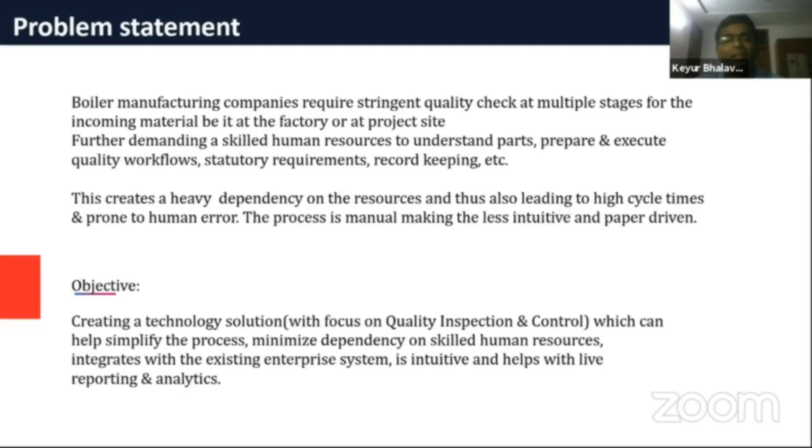The proposed solution is an amalgamation of multiple technologies, wherein the prime tech is AR, but it will be assisted with AI/ML, 3D workflow instructions, and remote collaboration.

The approach we are planning is to first start with wireframing, similar to storyboarding, where we'll understand the workflow, decide on the before and after workflow, and parallelly define the sketches for the technology front. After that, we'll go for a POC, wherein based on the output of the POC, we'll proceed with a full-scale implementation. While doing the POC, we'll work out the methodology.

We'll also take an important decision on a few steps, such as how to scan the object, whether it should be a QR code or a mix of AI, ML, and AR. We'll also decide how to guide and assist - once identification is done, how we can project things.

So the checklist would either hover around the object, or it will be a separate 3D model where you can interact and see. The technology we are looking at on the front end would be iOS, Android, and Unity.

On the backend side, the most important thing we wanted to clarify is that we currently use AWS, but we are open to using Microsoft Azure or Oracle Cloud if the company has that, we can definitely work around that. For visualizations, you scan the equipment - it can be a bigger equipment, a small equipment, or a part...

...and you will see pointers and the checklist coming near to that equipment. There is also an option wherein you can see a separate 3D view, which can also be taken as a training module for people who are a new hire or a lateral hire for the parts and equipment which are the incoming materials.

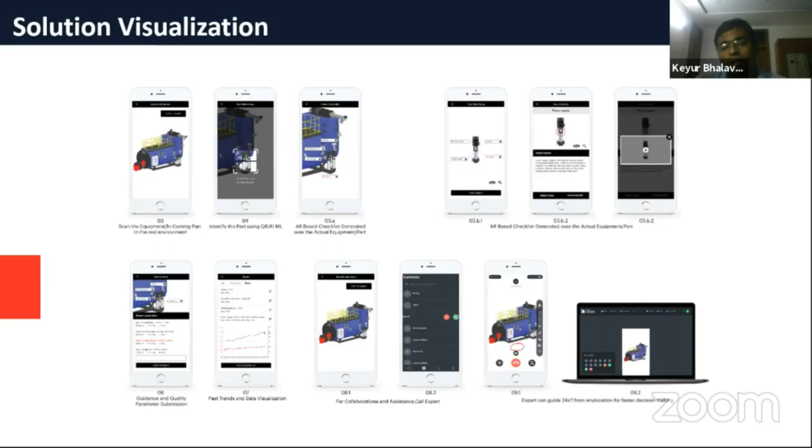In case you have trouble not being able to take a decision, or you have any doubts, we are intending to add a module for remote collaboration, wherein you can call an expert for help - it can be an expert, a supervisor, or any segment expert who might not be available at the same field.

The success criteria here would be measuring KPIs on productivity improvement, the time taken by the new hire to onboard on routine work, the before and after process work - the number of steps reduced, time reduced - the overall reduction in rejected parts, and the output of the solution.

Similar to what we were looking at from the objective perspective, it has to be tech-enabled, simplified process, cost optimization, minimizing the dependency, and on-the-job training. The timeline for implementation of this use case for the POC can be 6 to 8 weeks. For the full scale deployment, it can be 14 to 18 weeks.

This is a similar use case, almost an exact replica of the previous one. The only difference is this is maintenance, while the current use case is quality. Here we are digitalizing the complete manual maintenance process: identifying the machine, checking the maintenance schedule, selecting the checklist. The assisted pointer will be highlighted over the machine, and in case of any problem, a remote expert can be connected. We are also creating a digital library here, plus there is a maintenance schedule which will be triggered.

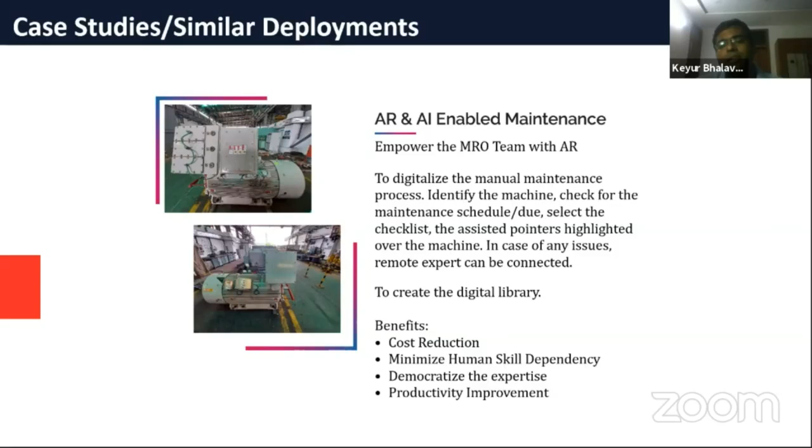Similarly, for inspection, if items are nearing their shelf life, the inspection can be triggered. Those kinds of similarities can be drawn, and that can help us execute the project even better. The benefits here: first and foremost is democratizing the expertise, which helps in minimizing dependency, reduction of cost, and productivity improvement.

Another similar case study is one of our ready to implement products, available as a subscription, where you can have remote assistance enabled with AR, which helps in collaboration between field service technicians and offsite employees. It benefits by not requiring a technical expert at every location, can eliminate travel, supports on the job training, improves first time fix rates, and can also help with inspections from remote locations. We have implemented this product across various companies like Sterlite, Reliance, Honeywell, etc.

Machine AR is nothing but the first step towards digital twinning, which is creating the 3D assets and procedures. That's what we're good at, creating a low poly model of all the assets. Once we have the low poly models, based on the use case, we can typically create AR based applications. It can be used for onboarding training, digitalizing the manual, customer engagement, or whatever the use case is.

For this use case, it can be more about creating the procedures and assets of these parts and equipment which are incoming, and then creating a training out of it - how to inspect, what sub assemblies need to be checked, and when we talk about the checklist, what pointers need to be typically checked.

I think this is it. These are a few of the clients where we have worked. Thank you so much, looking forward to the collaboration, and thank you everyone again, looking forward to working as a team.

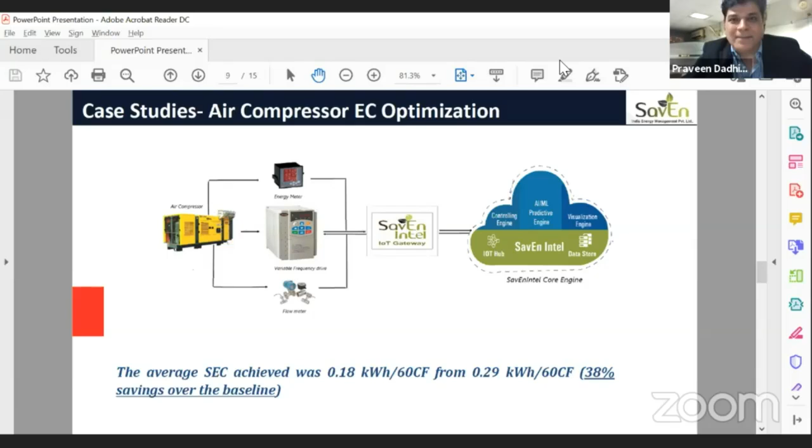Thank you, Praveen. Again, best wishes. Thank you. For actually working on the problem. Thank you so much. Okay, thank you.

Okay, next we have Nagendra. Hi, Nagendra. Congratulations. Thank you so much. It's been really amazing. Yeah, I'm sure you would have kind of spent a lot of nights in coming up with this. I mean, because considering the nature of the challenge it was actually very tricky. Good job. Yes, definitely. I completely agree. And I think our team here has put a lot of efforts, which made us to get this statement today saying that we are the winners. We're really happy. And it's the second time through NASSCOM. First time was with LG. We are AI partner for LG through NASSCOM. And this is the second time with RPG group through NASSCOM. So it's amazing platform. I'm grateful to the NASSCOM team.

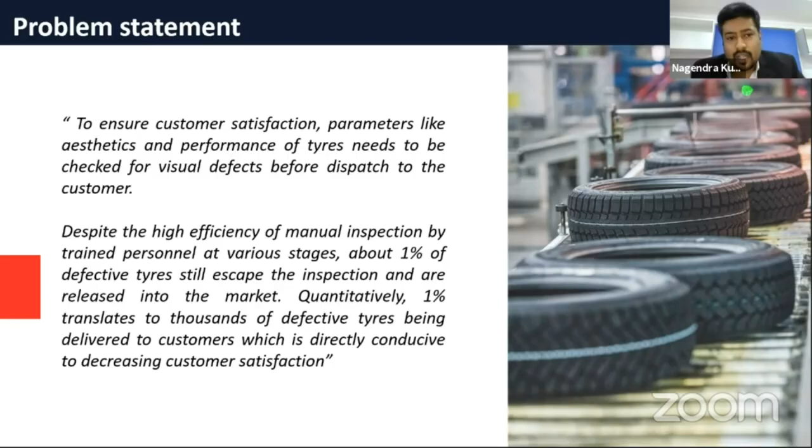Moving ahead quickly, as we all know the problem statement, so it was all discussed. Any tire missing the inspection going to the customer is a big pain to both of them. So that's what we are trying to solve, and how to solve it is here.

So we have completely given our thought to developing an in-house complete solution where you will have the tire getting inspected through, I would say, a kind of conveyor belt system where we have the capability of putting a 360-degree ball transfer system. So once the tire lands there, we have lasers which capture the profile of the tires from all 360 directions. This profile is then used and analyzed using a software solution, which is completely AI/ML based.

Our company specializes in AI/ML, and we are already working with LG for an anomaly detection use case. We also have the capacity to develop our own software along with the mechanical system to run the whole solution. Here the key aspect is the profile captured from the scanner exactly gives the anomaly, and we are also planning to use cameras. It can take your complete profile - edge, surface, all the technical aspects defined by the use case owner - taken care of by this solution. This can detect a defect up to 12 microns at a resolution of 2048 points.

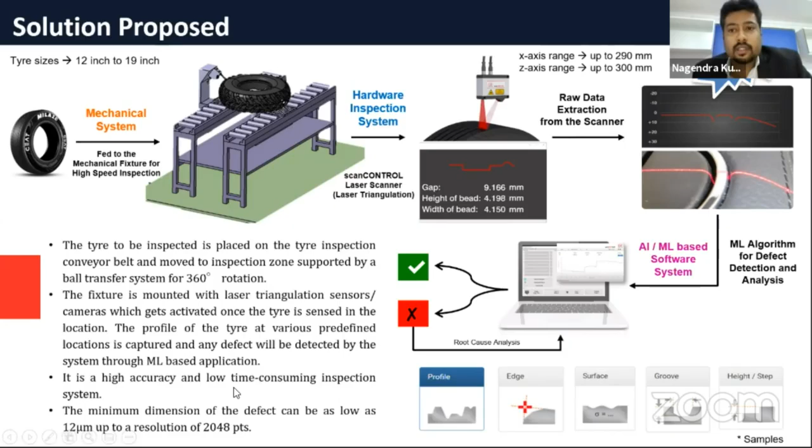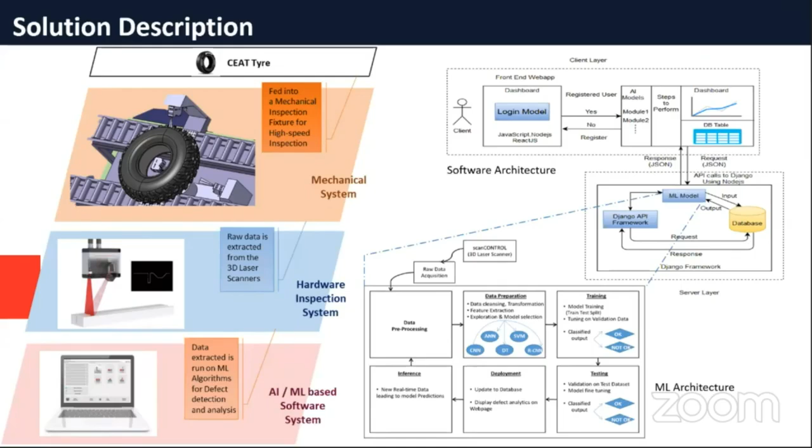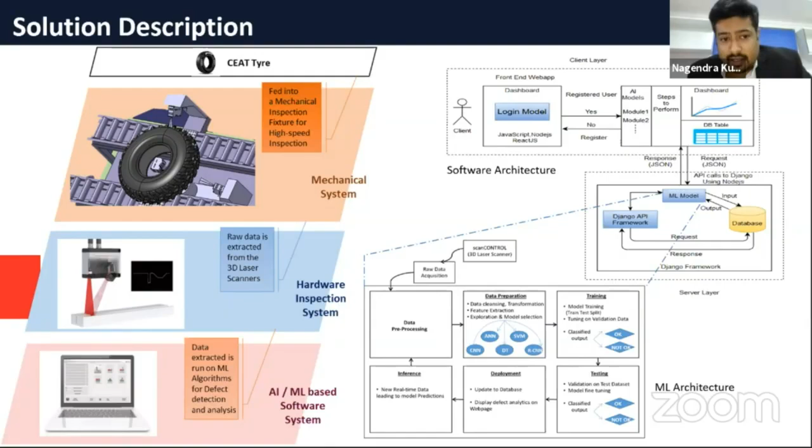What's special with Redom Tech is the ML models which we develop in-house. The actual profile of a good tire is taken up and trained, and we have complete expertise of training, testing, and deploying ML algorithms in the operational environment. We also have the capability of deploying the solutions on edge, and we are a partner for one of the US companies developing edge devices to handle such high-speed inspections.

The target we have kept is inspection accuracy should be more than 95%, and inspection time we are targeting is almost 10 to 20 seconds, which is our milestone, based on benchmarking with some of the people who have been doing this in the world. For defects handled, we are targeting 20 defects in phase 1, and phase 2 cumulatively 40. So escape rate we are targeting is less than 1%.

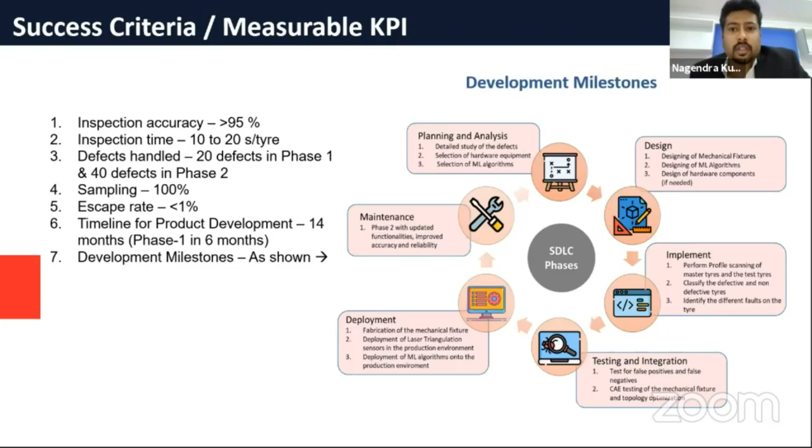Timeline-wise, we have phase 1 for 6 months, where we have the prototype, and the complete functional product in 14 months. To talk about case studies, we have undergone complete understanding that a German tire manufacturer is using these kind of sensors, as well as camera, to extract the 3D profile of the tire, where 95% and above defects have been identified and taken care of in the automated line.

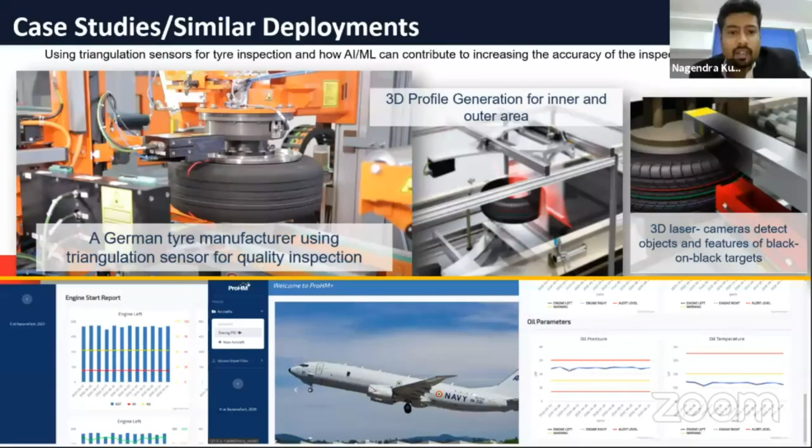If you see on the bottom of the screen, we are already developing a particular solution for Indian Navy, where we are managing the health of an aircraft with more than 3,700 sensor data coming every second. This is the kind of data we have handled and the accuracy we are targeting. This is what we would like to offer to our customer.

Thank you, NASSCOM. I would like to say thanks to all my team here who have made it happen to take the first step now. The big challenge is ahead on execution and delivery as per expectations. Thank you.

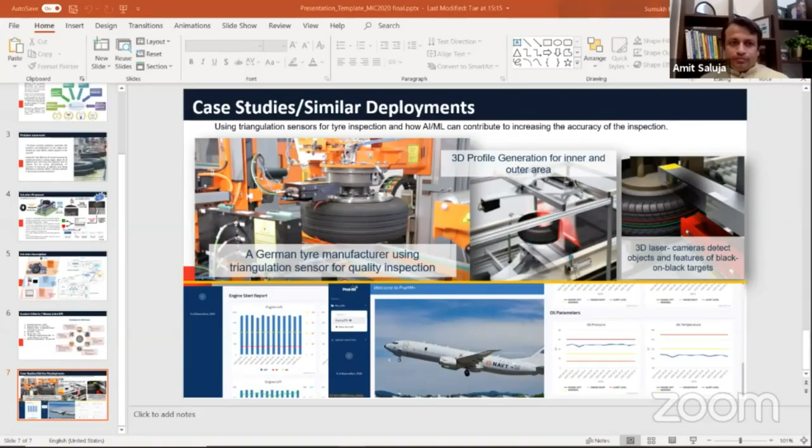Okay, so we have Akshata with us. Hello. Hi. Hi, Akshata, congratulations. Thank you, thank you very much. No, thank you. I know it's been again a very tricky use case with so much complexity. Good job doing it.

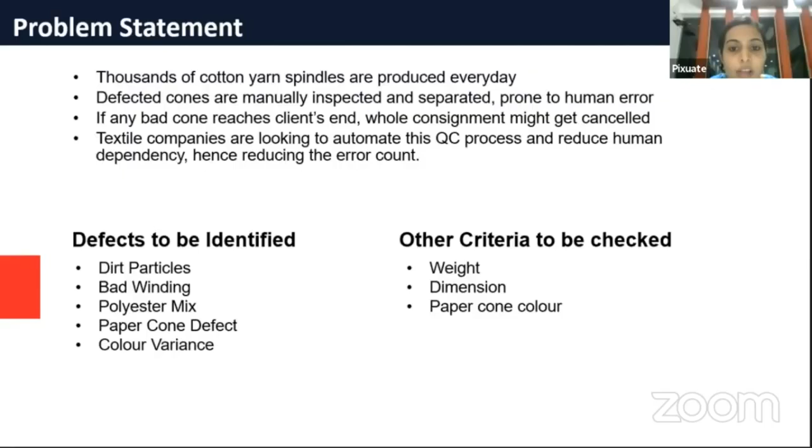Let me just go through the use cases and help you understand what we are trying to solve here. This is for the garment cotton yarn cone manufacturing sector, where thousands of cotton yarn cones or spindles are being manufactured, and there is QC required to identify defects at the last point, which is currently done manually. They are looking to automate this process using a vision-based application to identify defects such as dirt particles, bad winding, polyester mix, or different material mix in the threads, also a defect in the paper cone, and any color variance. So these are the different defects we are looking to identify, and also segregate based on different criteria, be it weight, dimension, or paper cone color.

So this is how the system will work. We will place our edge computing device with our proprietary vision software to do a 360-degree inspection on the assembly line inside a UV chamber.

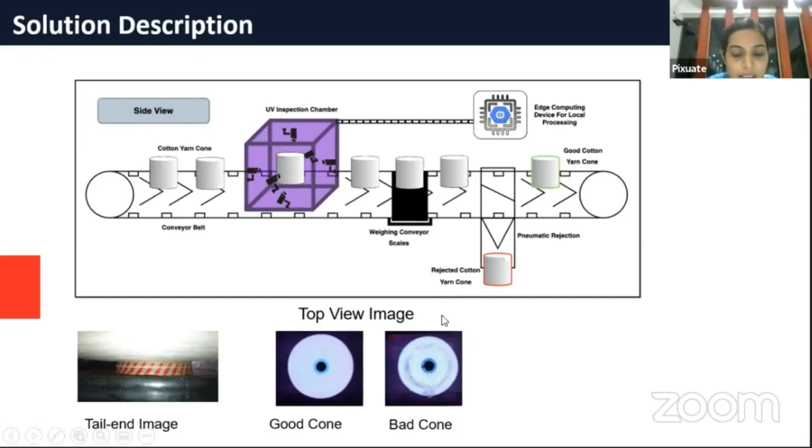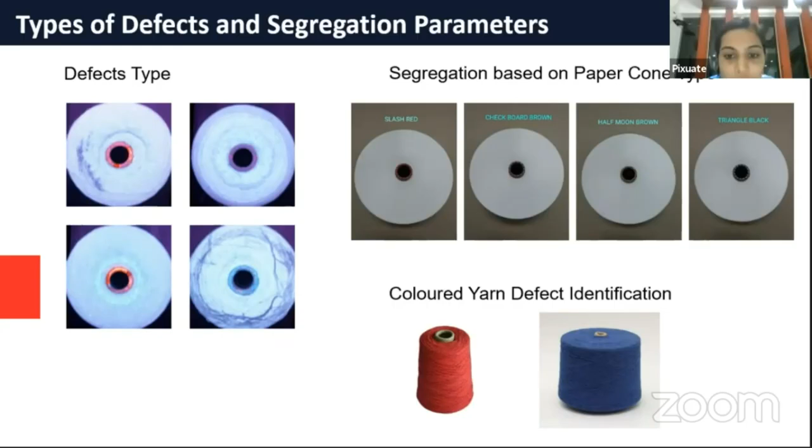And then based on the input, if there is any defect, it will be separated or segregated based on the segregation criteria mentioned. So we will be training our system to identify various defect types, also the cone types. We can work with both white threads or any colored threads, cones, and also further defects which the customer would have.

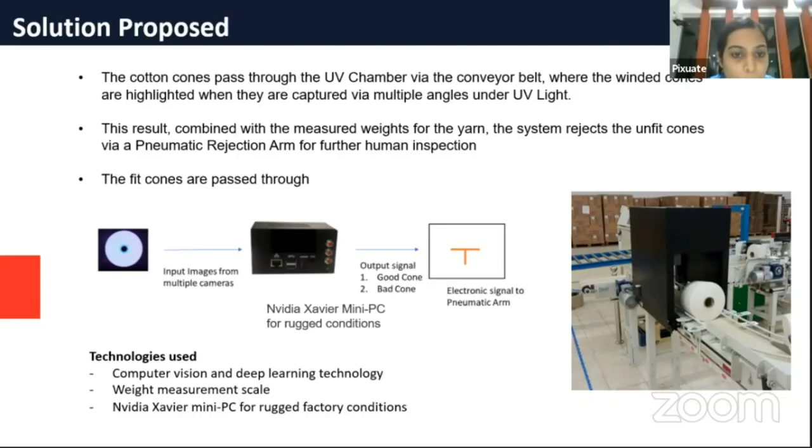So this is how the system is set up. We use computer vision and deep learning technology, and we can integrate various other sensors, be it a weight measuring scale or any other sensors required to work on a certain throughput that the customer requires. Currently, we can work on a throughput of

30 to 40 cones per minute, which can be improved as well. We are planning to deploy this solution in a 3-month duration, starting with the audit and site inspection, understanding the requirement, and then building a prototype, which would be a 6 to 8 week timeline, both for the hardware and software prototype. And then we can go ahead and deploy the pilot in the last month.

So what we are looking to achieve as an outcome of the solution is a system dashboard, which will help the customer monitor individual conveyors or even combined all-conveyor results. The audit report will be available, where both rejected cones and criteria of rejection will be available, so they will be able to monitor all of this in real time. This is a low latency model, with all results in real time and at a high throughput as well.

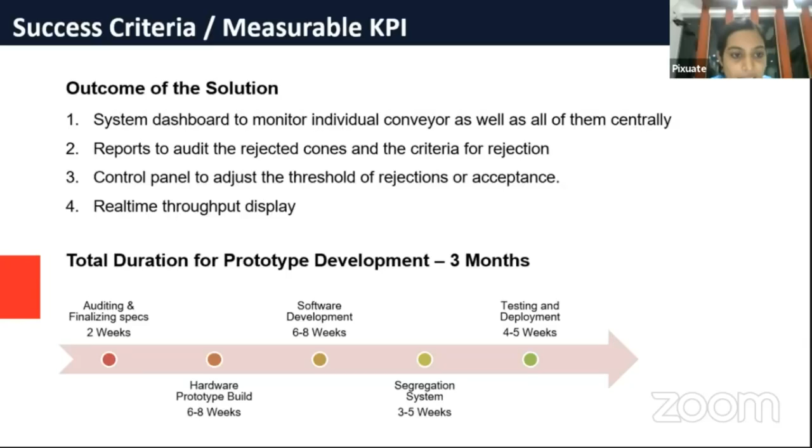So we had implemented a similar solution previously for a company in Coimbatore, and we have been able to achieve 0 false positives and a throughput of 30 cones per minute, and look to improvise the solution and build a very robust QC system for Gracia.

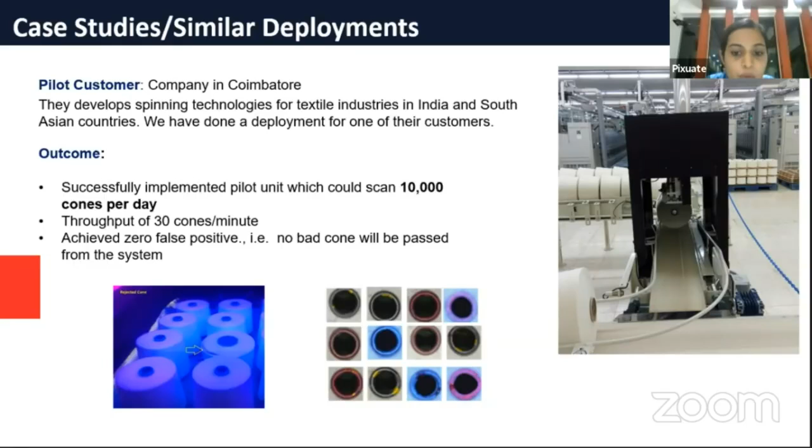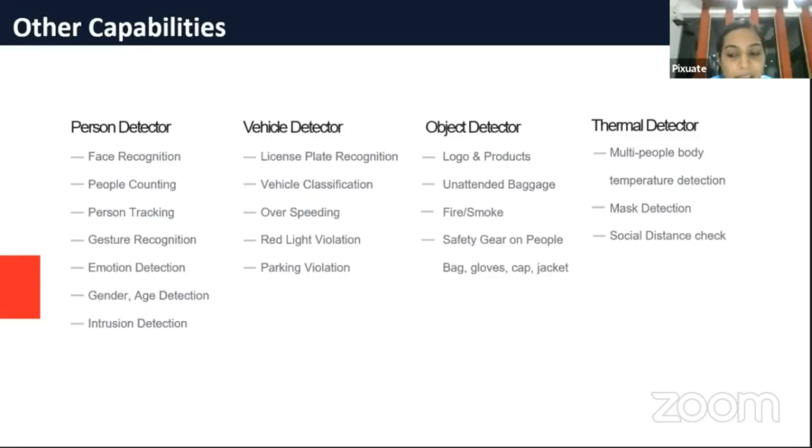Apart from this, as I said, our strength lies in doing custom R&D projects in the vision space. We also provide a wide variety of analytics for surveillance cameras, be it facial recognition or other person detection. We also have a very robust vehicle analytics module, safety gear checks, worker safety, and thermal camera analytics. So this is the other solution suite which we have apart from custom R&D projects. Thank you everyone for your time.

Great. Thank you, and best wishes when you actually work on the POCs. I'm sure it'll be exciting. Great. Thank you.

Okay, next we have Saurabh from Vashishtha. Hi, Saurabh. Hi, this is Saurabh, I'll just start my presentation. Many congratulations for winning. Yes, Saurabh, we can see you. Saurabh? Yeah, it's coming up. Should we share the presentation? Actually, I think I will switch off my camera, that's causing a lag. Okay, okay, yeah, can you see my screen now? Yes, we can see, go ahead. Okay, I think we'll just go ahead.

This was a proposal to the MIC2 challenge for material volume identification using image processing by JK Lakshmi Cement Company. This is a little bit about our company, and our aim is to develop indigenous manufacturing technology solutions. We are good in the development of machine hardware, electronics, image processing, programming 3D viewers and algorithms.

Currently, we are developing a panel scanning robot, which you can see on the right side. It gives a 3D model of a panel using a line laser method, and these are actually used for the aerospace industry, where we are working with ISRO. Also, a tender is awarded to us by IIT Palakkad, which also uses a laser sensor, shown in the middle drawing. And we are also awarded Dare to Dream first prize by DRDO and Idea Day Grant by Kerala Startup Mission.

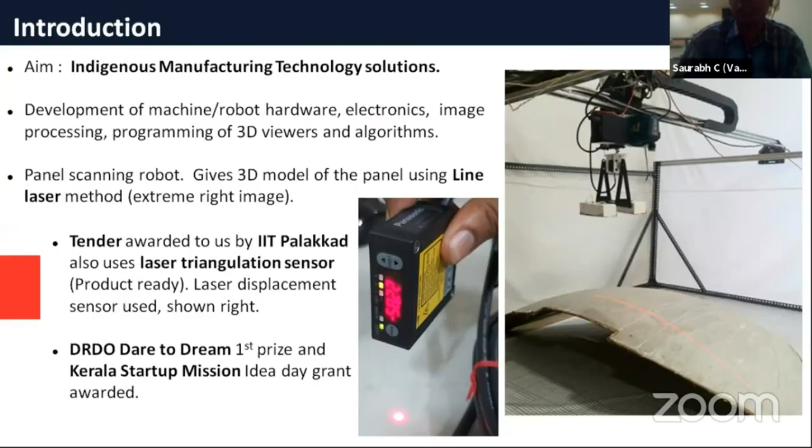So this is the problem statement. The first use case is for conveyor belt scanning. Some materials will be carried on a conveyor belt, and we have to measure the volume and surface area of that material, which may be in a large size or fine powders. An IP camera is located above the belt, and real-time latency is required. The second use case is for stockpile volume estimation, where there will be a big heap of material, and we have to estimate the volume and surface area and display it in a 3D viewer.

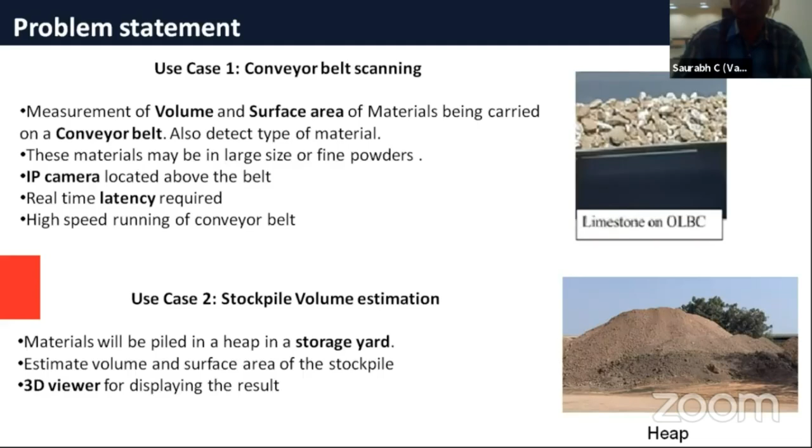So this is our solution proposed for conveyor belt scanning. It uses a line laser scanning method, using laser triangulation. A line laser projector will be mounted above, it will project the line, and the profile will be captured by an IP camera. We integrate this profile over time to get volume, and we integrate the perimeter over time to get surface area, and the belt speed must be known for integration.

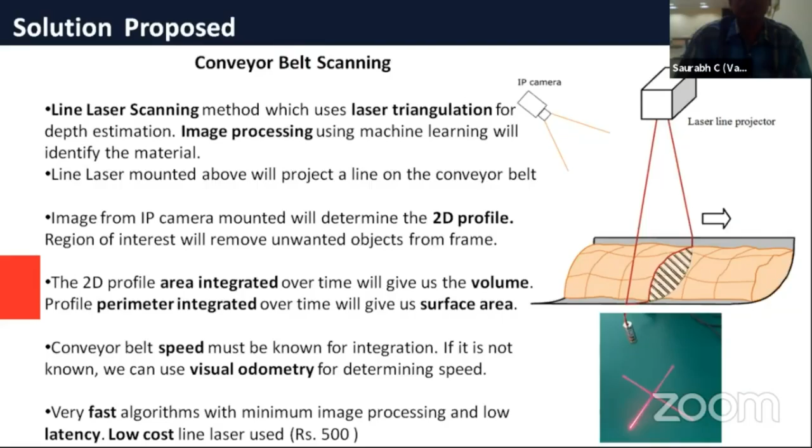This algorithm is very simple and will be very fast; it will operate in real time. For stockpile volume estimation, we propose a LiDAR-based scanning solution. There will be a LiDAR mounted, scanning over the surface, getting points on the surface, and from that point cloud we can compute the volume and surface area. Once set up, it can be fully automated with minimum manual steps.

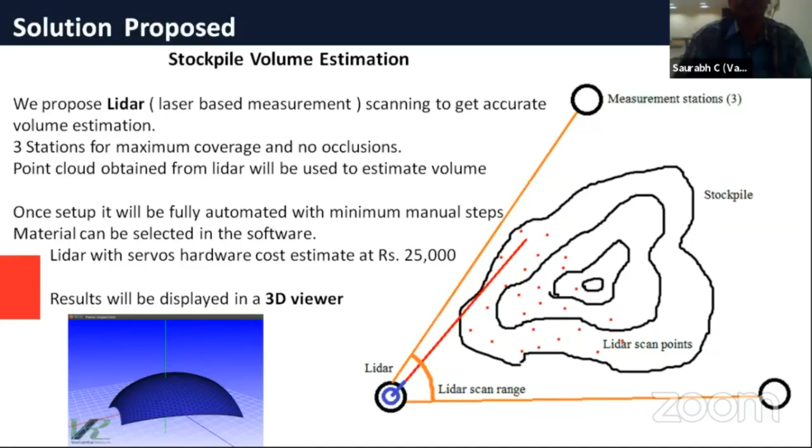LiDAR with servos, the hardware cost we estimated at around 25K, and the results will be displayed in a 3D viewer, which you can see on the left side. We are developing the 3D viewer for the panel scanning.

This would be the success criteria and measurable KPIs for our project: the accuracy and precision of the volume, which will tell us how good our estimate is, and also the latency time.

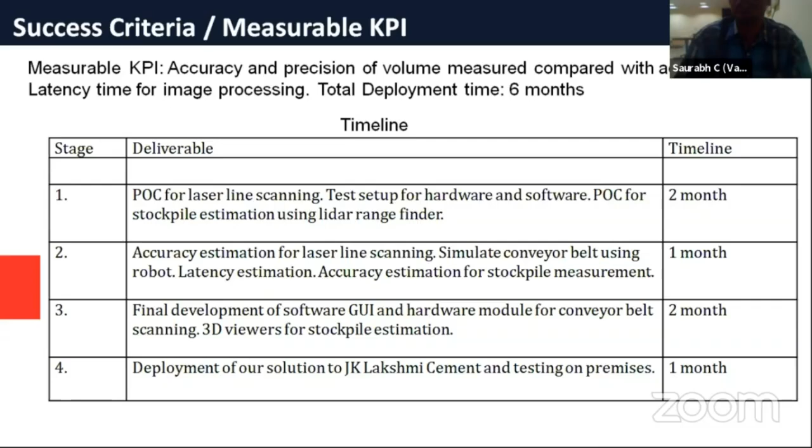And this is the basic timeline that we have. First is for the POCs, around 2 months. Then accuracy estimation, another 1 month. Then final development of software GUI, hardware modules, and deployment, another 3 months. And this is the case studies of similar products available in the market.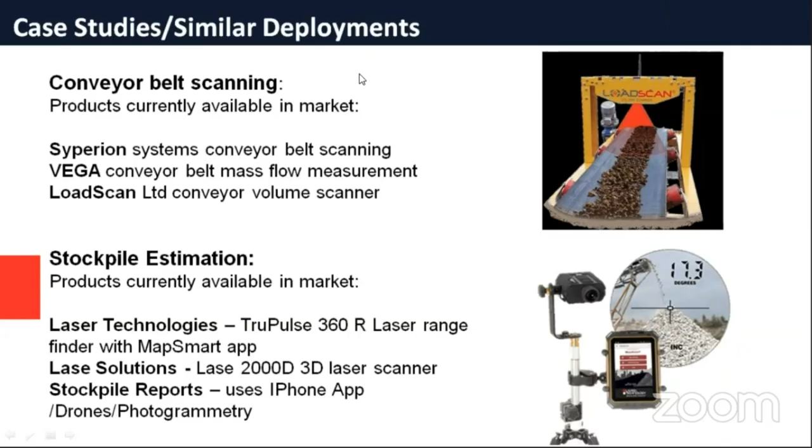Thank you, Saurabh. Great presentation, and best wishes for working on this use case. Okay, thank you, and I will stop sharing. Okay, yeah.

Okay, so next we have Pratik. Yeah, hello. Hi, Pratik. Hi. Congratulations for coming up with such an innovative solution under 2500. Congratulations. Thank you. Okay, are you able to see my screen? Yes. Yeah.

Our solution was for e-lock, a cost-efficient e-lock for Mother Dairy, for an application of Mother Dairy. This is our profile; we are funded and supported by iCreate and the Ministry of Electronics and IT. We are a fairly early stage startup focusing on developing smart locking systems for various applications.

We have experience of more than 3 years in the consumer IoT domain, and we mainly focus on reducing costs while building efficient systems. This was the problem statement in which we had to nullify any chance of milk adulteration in the container on wheels. It provides poor quality of milk to the customer, as well as depreciates the brand image of Mother Dairy.

Our solution provides a durable locking mechanism with a proprietary double hinge mechanism. We'll be providing a mobile app with access through feature phone also. The mobile app will have geofencing and on-demand tracking through GPS. We can get real-time alerts through the mobile app and embedded sensors inside the lock. Our solution will be extremely low power with a backup time of up to 3 months, and to top it up, the solution will be under 2,500 rupees.

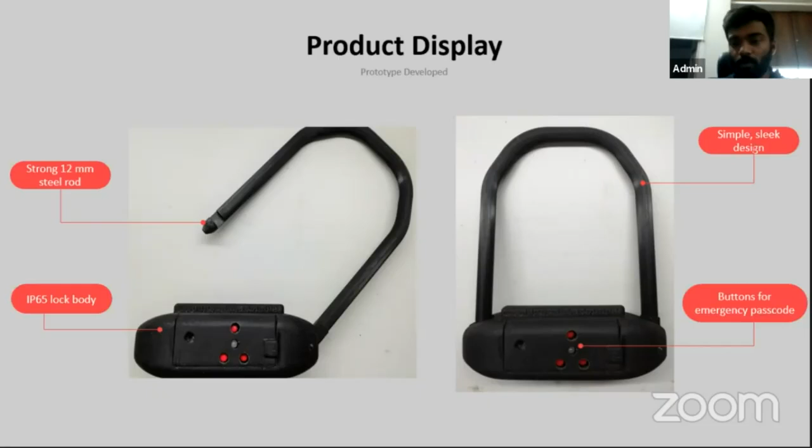This is our product which we are currently developing. It is for bicycles, and it basically has the same features which the application for Mother Dairy requires, but it's just different in shape and size. We are providing an IP65 lock body for this, and a strong 12 mm steel rod. It has a sleek, elegant look, and there are options for an emergency passcode also through these buttons. The passcode can be a pin like 1234, or it can be Morse code, or it can be letters also.

So we are better in the sense that we reduce false alerts. We provide 2G network connectivity for remote places. Our mobile and web applications are fairly smooth, which ensure smooth GPS tracking. We provide customized solutions and assured battery life.